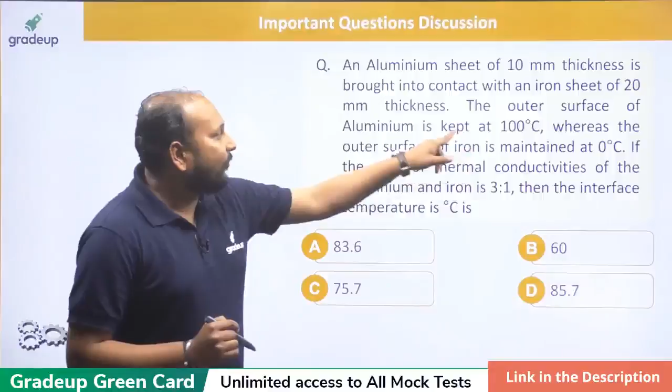The first question of the day: an aluminium sheet of 10 mm thickness is brought into contact with an iron sheet of 20 mm thickness. The outer surface of aluminium is kept at 100 degrees Celsius, whereas the outer surface of iron is maintained at 0 degrees Celsius. The ratio of thermal conductivity, K of aluminium to K of iron, is 3:1. You have to tell me what is the interface temperature. Quickly solve it.

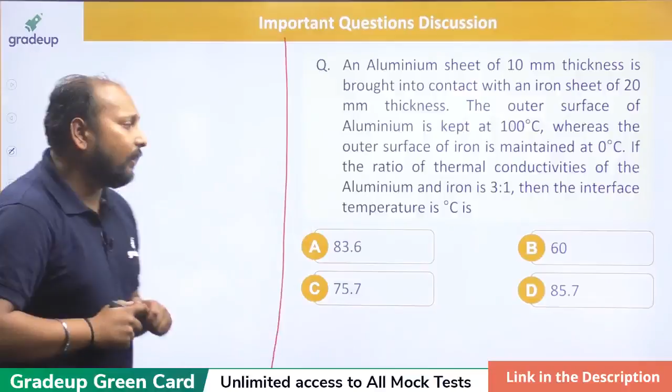So let us solve this question. Ajay Yadav, I got one answer from Ajay. Anyone else who has solved this problem? Rahul, Rashad, please quickly solve it. Very basic. Let me help you out.

It's basically we are having two different materials. One is aluminium and another is iron. Aluminium is kept at 100 degrees Celsius and iron is kept at 0 degrees Celsius. The thickness of aluminium is 10 mm, and the thickness of iron is 20 mm. You have to tell me what is the temperature at the interface T.

Very good evening, Akash. Yes, very good. I got one correct answer from Anil. Anil Akhil, your answer is correct. Ajay Jadhav, please check your answer. Pramod, yes, correct. Rashad KP, your answer is correct. Very good. Satyakant Mishra, very good. After long days, I am seeing Satyakant. Answer is correct.

So how to solve it? Very basic. It's in series, so same heat will be flowing. So directly you can apply Fourier's law of heat conduction. So it will be minus K of aluminium into cross section area into 100 minus T upon the thickness. Let us assume I'm taking in mm, so your calculation will be very easy. Is equal to, not minus, it will be plus, K of iron into cross section area into T minus 0 upon 20.

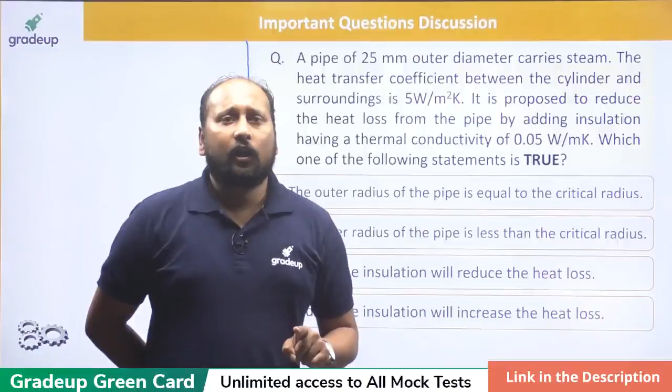What is the level of questions? It's basically at the level of SSC JE, 1 mark problems. You can practice previous year GATE 1 mark problems for VIZAG Steel. Because calculators are not allowed, you won't be getting very difficult problems, and time will be the main constraint, so you need to increase your speed.

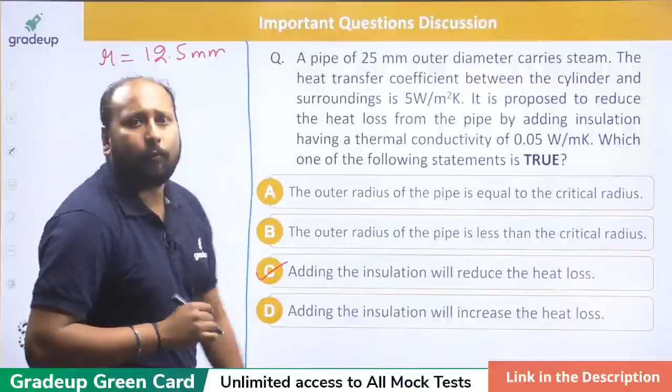Option C. Okay, very good. All of you are correct. Option C is the correct answer. Let us check. Your radius is coming out to be 12.5 mm. And RC, the critical radius of insulation, is K by H. Again, the same formula. K is 0.05 and H is 5. So it comes out to be 10 mm. Your RC comes out to be 10 mm.

Now, if RC is 10 mm, your radius is already 12.5 mm. That means on the graph, this is your RC, and you are lying in region number 2. Added insulation will decrease the heat transfer. So adding insulation will reduce the heat loss. Option C.

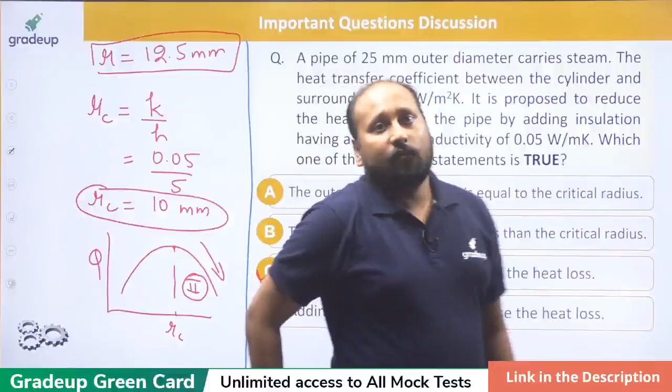Mohan Maya, yes, VIZAG Steel has postponed their paper. So yes, a similar pattern you can expect in SSC JE. So basically, you are preparing indirectly for SSC JE. Don't worry. Okay.

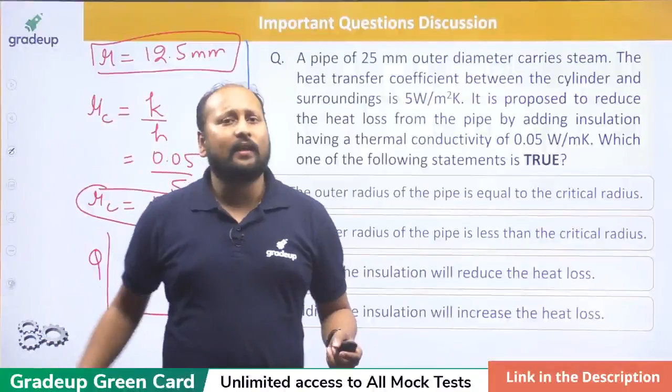Never ever. Whenever any exam is postponed or cancelled, don't worry, that preparation will be helpful for any other examination, and a series of examinations is coming in line, so don't worry, just be ready for any examination you are having. Let us go for the next question.

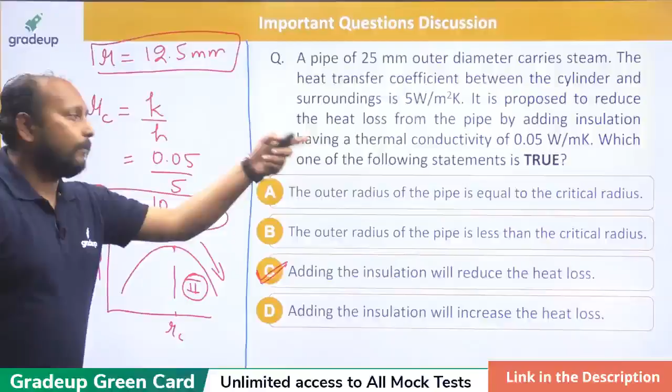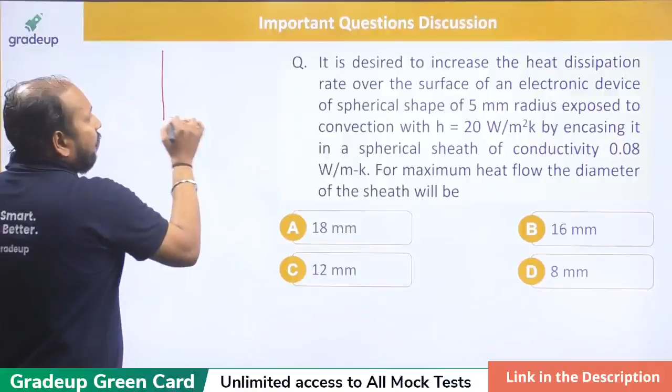It is desired to increase the heat dissipation rate over the surface of an electronic device of spherical shape. Please remember it's a spherical shape of 5 mm radius exposed to convection of 20 watt per meter square Kelvin, by encasing it in a spherical sheath of conductivity 0.08 watt per meter Kelvin. For the maximum heat flow, the diameter of the sheath should be? Quickly tell me. So basically they are asking when your maximum heat flow is occurring, this is your curve. It is occurring when your radius is equal to the critical radius of insulation.

Yes, quickly tell me. Now we are getting a mix of answers from Jagdish and Satyakant. Okay, Satish, fine. So I'm getting a mix of answers. Which answer is correct? Please tell me. Rashad is correct. Sharmila is also correct. Rahul Sharma is also correct. Very good. Rahul Sharma.

What is the formula for spherical? Please remember it's a spherical surface. So remember, whenever you are talking about critical radius of insulation for a spherical surface, the formula is RC is equal to 2 into K by H. Yes, exactly, Rashad, correct. 2K by H. Now, what is K? 0.08. H value is 20. So it comes out to be 8 mm. Your RC is 8 mm.

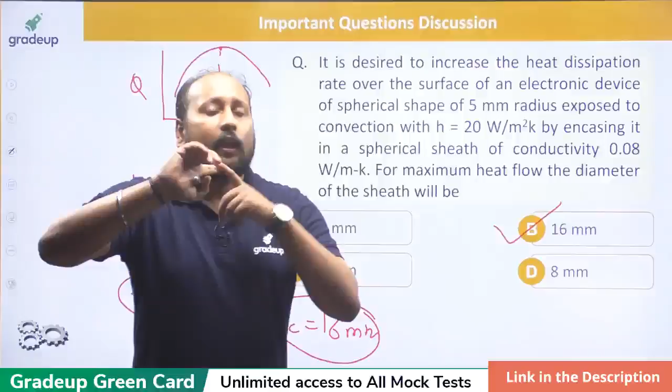In the question, are they asking radius or diameter? Please check the statement of the problem. They are asking the diameter. So those students who have responded option D are absolutely wrong. Then your DC is equal to 16 mm. So option B is the correct answer. I've seen some of the students have responded D. In a hurry, students do commit mistakes. They know the concept, but in a hurry, they mark the wrong option. So I deliberately took up this question. This is a very easy problem, but still students have marked option D.

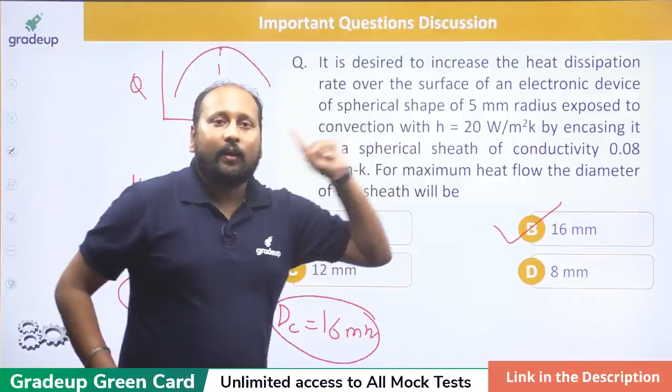Is that clear? So remember, always try to read the question once, and if you feel any parameter you need to write, just write it on the paper. If they're giving rough paper, just write it: diameter you need to calculate. Because in a hurry you might calculate radius, mark option D, and your answer is wrong. It's a very basic question.

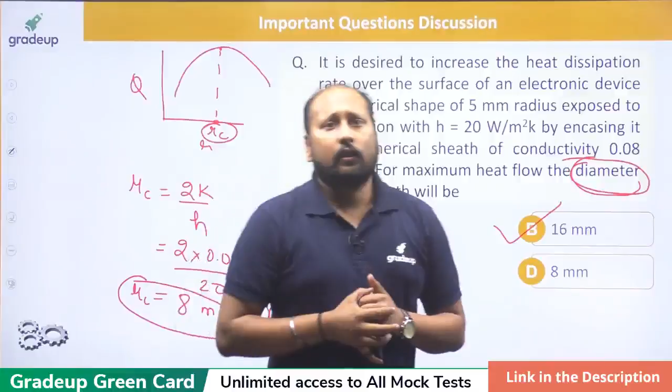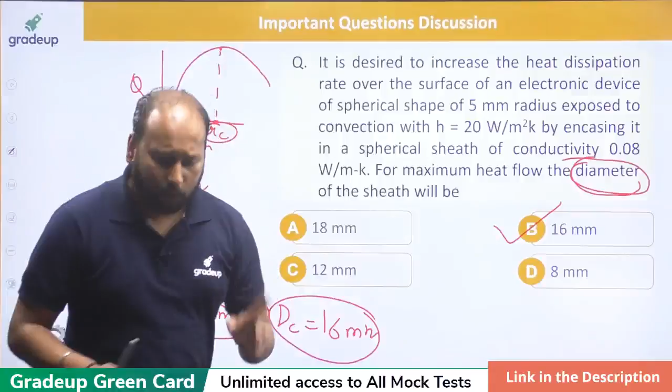Sir, will the BARC exam on Wednesday be postponed? No. BARC examination is still on its scheduled time only. No postponement of the BARC examination. Yes, VIZAG has postponed it. So don't worry about BARC. Let us go to the next problem.

Now, a spherical shaped orange, K is equal to 0.5 watt per meter degree Celsius, having 60 mm diameter, undergoes a ripening process and generates 8000 watt per meter cube of energy. If the external temperature of the orange is 20 degrees Celsius, determine the maximum temperature at the center of the orange. Now it's a question from the heat generation topic. Please apply your concept. There's a direct formula for calculation of the maximum temperature of the body. We have an orange whose surface temperature is 20 degrees Celsius. You need to calculate the maximum temperature of this body.

Q dot, your heat generation, is 8000 watt per meter cube. This is the internal heat generation. Next, let us convert this into radius. Radius is 30 mm. And the surface temperature TW is equal to 20 degrees Celsius. Now, what is the Tmax formula? I got one answer from Satyakant. Your answer is absolutely correct. Very good. Prahlad, yes, whenever you get a chance to attend sessions, definitely do attend them.

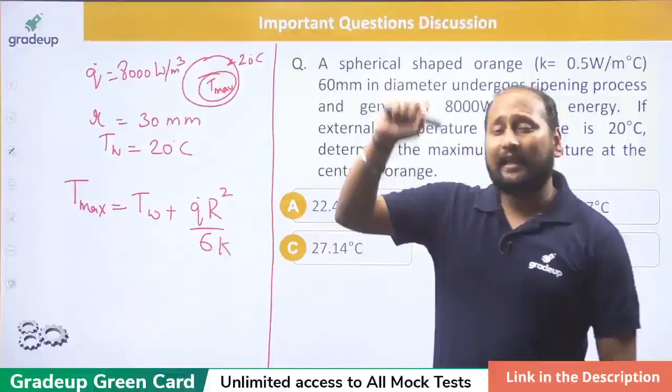So what's the formula? Direct formula: T maximum is equal to TW plus Q dot R square by 6K. Those who have studied the three-dimensional heat conduction equation in spherical coordinates with internal heat generation, remember, you have derived this expression. So they are asking this direct formula. T max: TW is 20 plus Q dot 8000 into radius 0.03 whole square upon 6 into K value 0.5. Try to solve it.

Yes, very good. Sadanand Mahato, correct. Avinash, Rakesh Mohanty, very good. Your option is correct. You will be getting approximately 22.4 degrees Celsius. So option A is the correct answer.

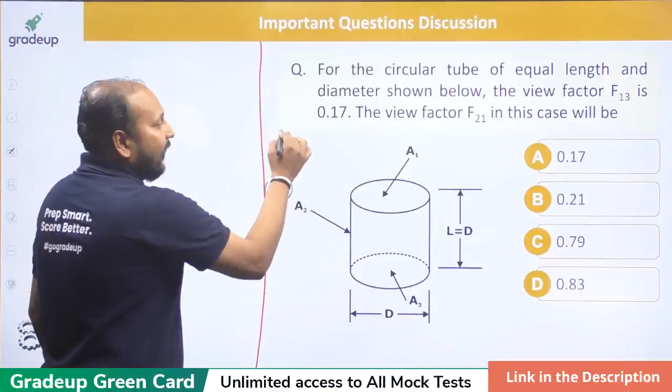Okay, so very good. So let us go to the next question. For a circular tube of equal length and diameter shown below, the view factor F13 is given as 0.17. F13 is equal to 0.17. It is given. Now this is the second type of problem which is definitely being asked in SSC JE and any PSUs, because it is very easy to solve. If you know the concept, you will definitely be able to solve this. Okay, just try to solve this problem.

F13 is given. They are basically asking what is the shape factor F21. This is surface 1. The surrounding circumferential surface is surface 2, and the bottom surface is surface 3. They are asking what is F21. How to solve it? You need to apply only two theorems, that is summation rule and second is reciprocity theorem. Just apply these two concepts, you will definitely be getting the answer.

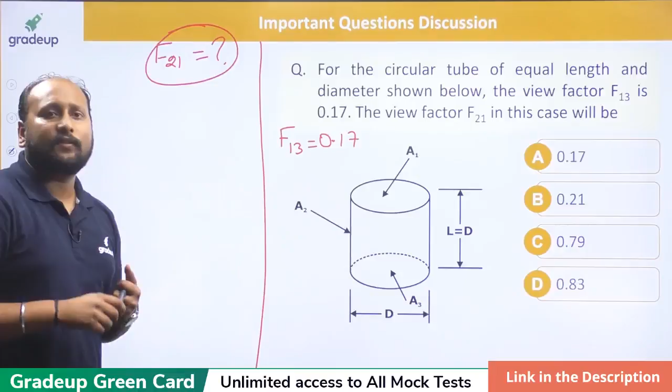So I got one answer from Nitish. Very good. Your answer is not correct, because I suppose you are calculating F12. Calculate F21.

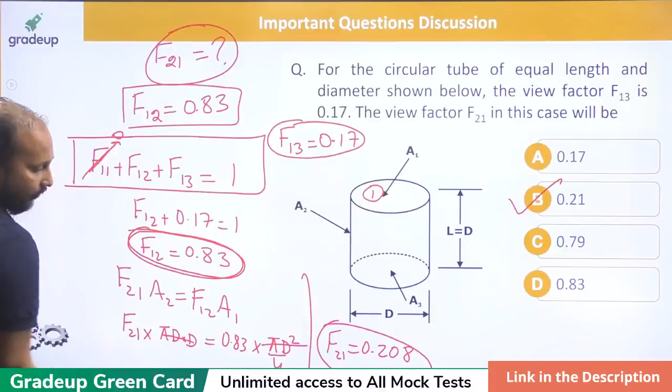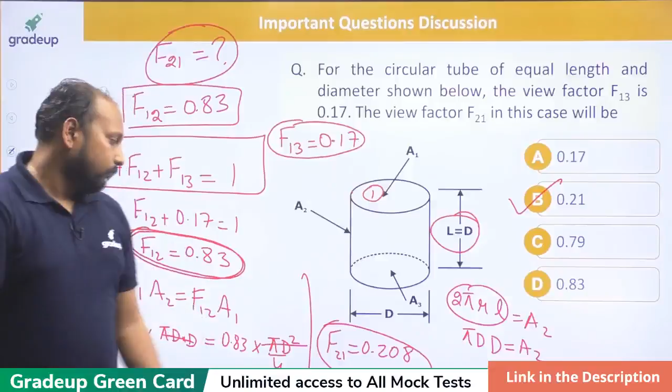So F21 into A2 is equal to F12 into A1. What is A2? A2 will be 2 pi R into L. This is the A2. Fine. In this case, what is radius? It is equal to capital D by 2, or you can directly write this as pi into capital D. What is L? L is equal to D. So pi D into D is equal to A2. A1 will be the area of this circle, which is pi by 4 D square. Clear? Just solve it. You will be getting the correct answer, 0.208.

Let us solve this problem. You need to apply Reynolds-Colburn analogy. Prandtl number is given. Prandtl number is equal to 0.064. Friction coefficient CFX is equal to 0.64. You need to calculate what is Stanton number.

Very good. I got one answer from Satyakant and he is absolutely correct. Anyone else? Option A, B, C or D? Yes, very good. Rahul is correct. Rahul Sharma, I got 2 answers. I need more answers from you guys. I'm giving you a hint.

You need to apply Reynolds-Colburn equation, which is Stanton number into Prandtl number power 2 by 3 is equal to CFX by 2. This is the formula. Now Stanton number you need to calculate. Prandtl number 0.064 power 2 by 3, and CFX is 0.64 by 2. What is 0.064 power 2 by 3? It is 0.4 whole square. So Stanton number into 0.4 whole square is equal to 0.64 by 2. Just calculate it. You will be getting Stanton number is equal to 2.

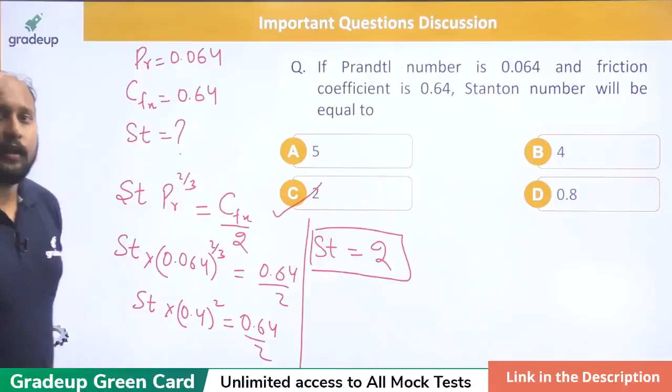Without calculus, option C. Option C, very good. Rashad, no, you will be getting option C as the correct answer. Option C. Clear? Option C, very good. Nitish, Jagdish, Gurana, Pralad, very good. Abhinandan, after a long time, Abhinandan. Option C, yes, very good, correct.

So let us move to the next problem. Now this question is from the heat exchanger. It seems to be a very lengthy problem, but when you read the statement, it's a one-liner problem. Just read the statement. A counterflow double pipe heat exchanger using superheated steam is used to heat water at a rate of 10,500 kg per hour. The steam enters the heat exchanger at, let me help you out with drawing the diagram.

Let me help you out with drawing the diagram. This is your hot fluid, this is your cold fluid. Your hot fluid is entering at 180 and leaving at 130. Your cold fluid is entering at 30 and leaving at 80. So this is your delta Ti, this is your delta To. Now what is delta Ti? Delta Ti is equal to 100, delta To is equal to 100. What is LMTD? Quickly tell me what is LMTD.

It is skin coefficient, coefficient of skin friction. Okay. Option C. Very good. Correct answer. Naveen, Ganesh, very good.

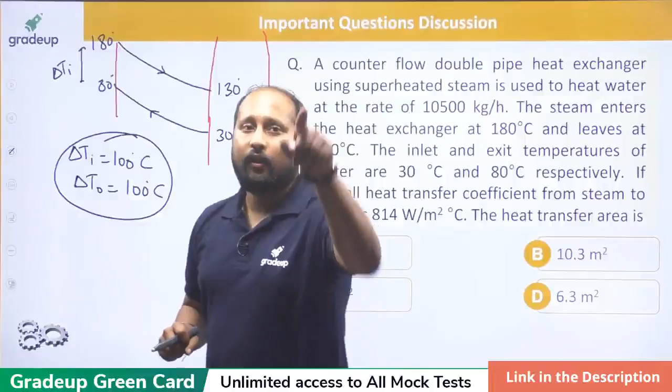Now, whenever you are having a condition such that your delta Ti and delta To are same, then what is LMTD? Very good, Nitish Kumar. In that case, your LMTD, which is denoted as delta Tm, will be exactly equal to any of the two temperatures, which is equal to 100 degrees Celsius. Exactly, very good. All of you are correct. Avinash, Rakesh, Satyakant, Ganesh, 100 degree.

Now, you can directly use the formula U A delta Tm is equal to m dot Cp delta T. They have given the mass flow rate of hot fluid, so you'll be using the hot fluid, and please convert this into SI units. So this is 10500 divided by 3600 mass flow rate into Cp of water, 4187, into temperature difference, 180 minus 130, so it will be 50.

You need to calculate area. U value is already given, it is 814. So you'll be getting A approximately equal to 7.5. Option C, you'll be getting option C as the correct answer, 7.5 meter square. Exactly. So whenever in counterflow these two temperature differences are the same, you can directly say LMTD is equal to any of the temperature differences. Is that clear? So option C, 7.5 meter square is the correct answer.

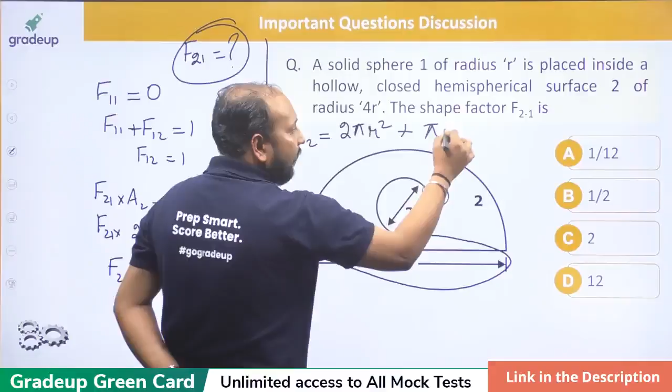Now there is one thing: this is your 2 pi r square, plus you need to take this area also. This is your pi r square, which is 4r whole square. You need to take that also. If you take this, this will be the total area. So let us change the value of A2. It will be F21 into 2 pi 4r whole square plus pi 4r whole square. Now it's correct. So F21 will be 1 by 12.

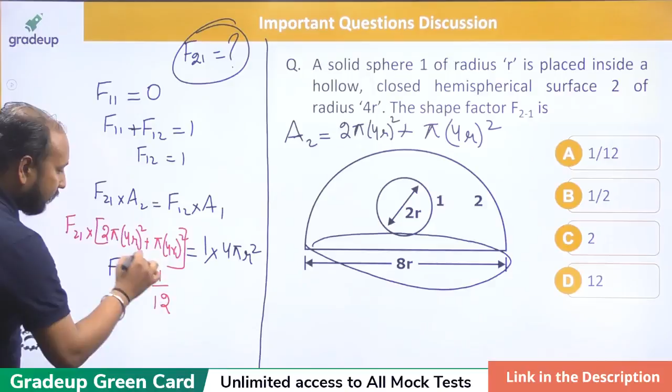Just take the common term of 4 pi r square, that will be cancelling out. Just take this 4, you'll be getting 1 by 12. Exactly. Very good, Rahul. And please check, Dikshant, you'll be getting option A, 1 by 12. 1 by 12 is the correct answer.

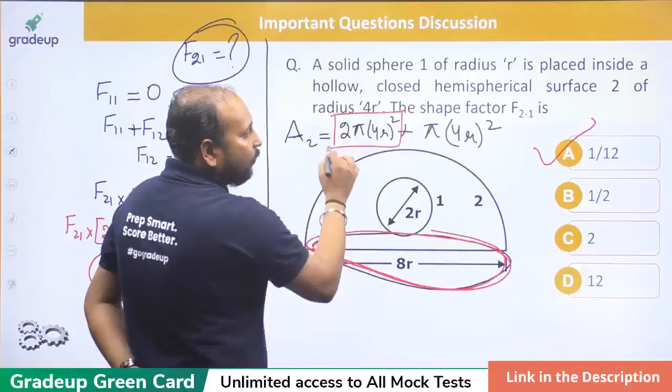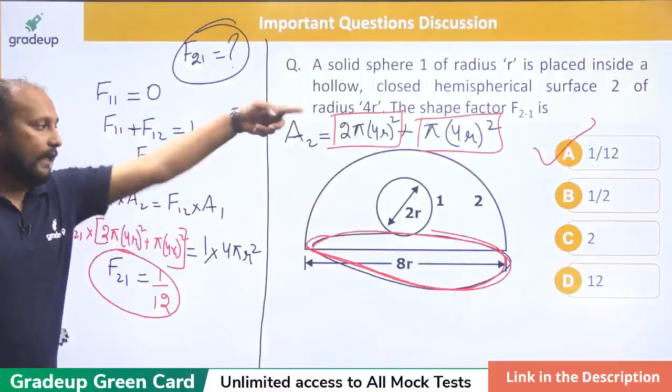You need to take the complete area, because you cannot neglect this area also. So what is this area? This is 2 pi r square, which is your 4r, plus pi r square, which is pi 4r whole square. Thank you, Prahlad. So 1 by 12 is the correct answer, option A. I suppose now you have understood how to solve the problem coming from shape factor. Let us move to the next problem.

Now this problem is from your convection topic. Yes, you need to take the total area, because some of the students in a hurry are not taking the base circle, which is also one of the surfaces of that hemisphere.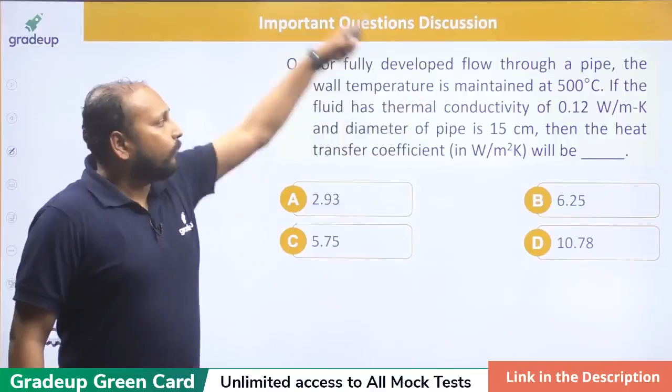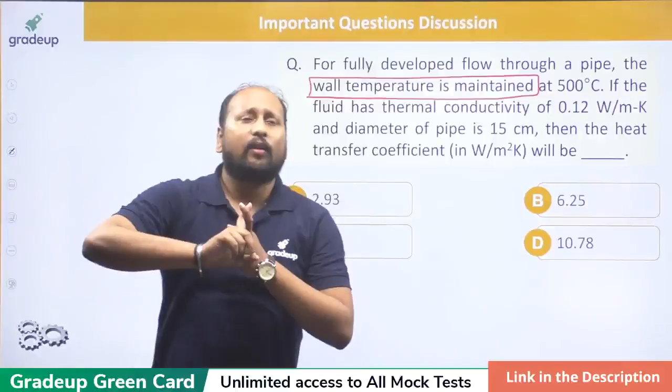Now talk about this. There is a flow through pipe going on. The wall temperature is maintained. What is the meaning of this term? Always remember, whenever we are talking about flow through pipe in laminar flow, there are two approaches: one is constant heat flux and second is constant wall temperature. So this is the case of constant wall temperature.

So what is the Nusselt number for constant wall temperature? Always remember, it is directly equal to 3.66. So h into D by k is 3.66. You need to calculate the value of h: 3.66 into k, which is 0.12, divided by diameter. The diameter of the pipe is 15 centimeter, that is 0.15. So tell me the approximate value.

Yes, exactly. If this had been constant heat flux, the Nusselt number would have been 4.36, so you can expect another question like this. This is a constant wall temperature case, so the Nusselt number is 3.66, and h will be approximately 2.9. So option A.

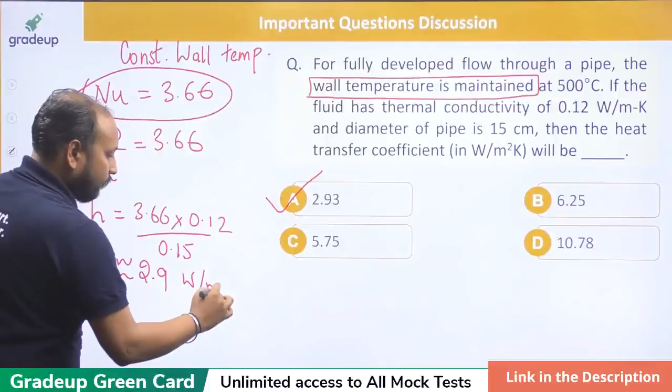Option A. Okay. Yes, very good. How to get a maximum in exam, solving more problems or understand problems? How to get maximum in exam? Look, if you are talking about SSC JE or any PSU exam, you need to increase your speed, because the question difficulty is not that much high. You need to increase your speed, then only you will be able to crack it.

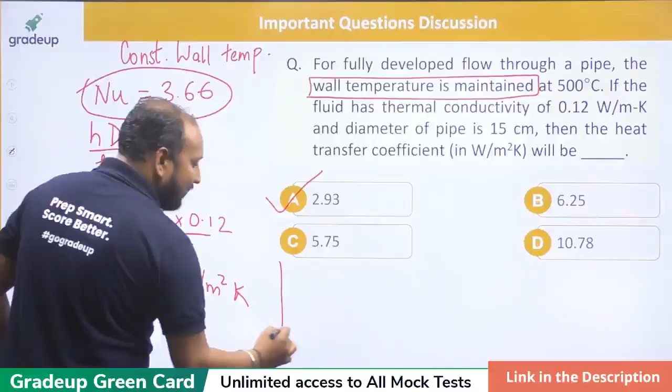Effect of variation of K with temperature distribution. I have discussed this. There are three curves. Those who remember, there are basically three curves like this. Fine. Your temperature with distance x or delta. So there are three curves. One is beta greater than 0, beta less than 0.

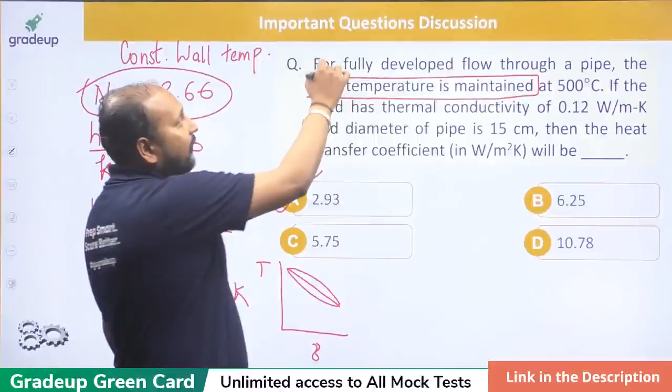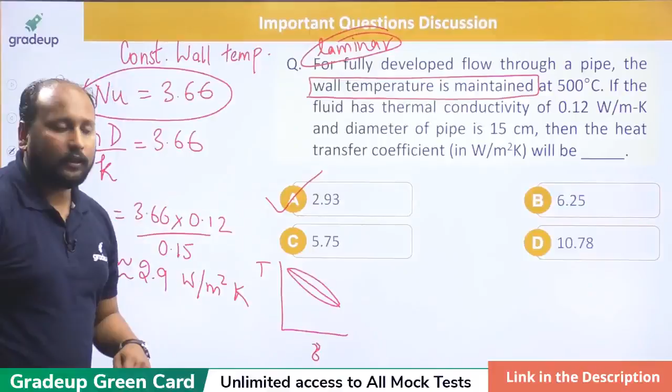Yes, you need to assume it to be a laminar flow. Why laminar flow? If this would have been a turbulent flow, they need to give the expression also. They need to give the empirical formulas also. Then only you will be solving the question from the turbulent flow. Now in this case, no velocity is given, and also they are stating it as fully developed flow. Wall temperature is maintained. So by default, they are talking about a laminar flow, that is constant heat flux condition or constant wall temperature condition. Clear? Next question.

Yes, again a very basic question from your

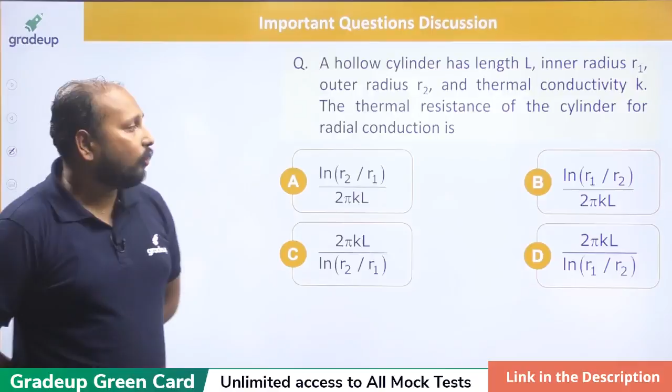Yes, very good all of you. Mahato, Rashad, Sadanand, Rahul Sharma, very good. Lucky, option A is correct, because what is the formula for a cylinder? For a cylinder, your thermal resistance RTH is equal to ln R2 by R1 upon 2 pi KL. This is a pipe having a length L. It is a hollow pipe having radius R1 and R2.

We take a bigger circle. So this is R1, this is R2. So ln R2 by R1 upon 2 pi KL. Option A is the correct answer. Very good. Let us move to the next question, because I don't suppose any explanation is required. It's a direct formula base.

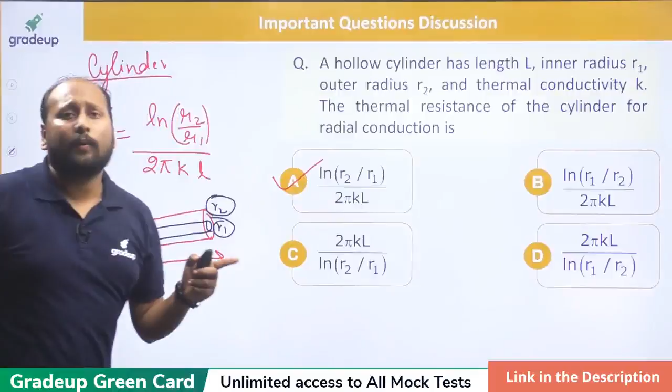Chiranjit Karmakar, no, option B. How can it be option B? This will be negative, because R1 is the internal radius and R2 is the external radius. If this were negative, then the thermal resistance would be negative, which is not justified. It should be a positive value. So it is ln R2 by R1. Option A. Next question.

A solid cylinder is located at the center of a hollow sphere. So we have a hollow sphere, and at the center of the hollow sphere we have a cylinder. The cylinder is surface 2 and the hollow sphere is surface 1. The diameter of the sphere, D1, is 1 meter, and the cylinder diameter and length are both 0.5 meter, that is D2 = L = 0.5 meter. You have to tell me what is F11. You need to calculate F11.

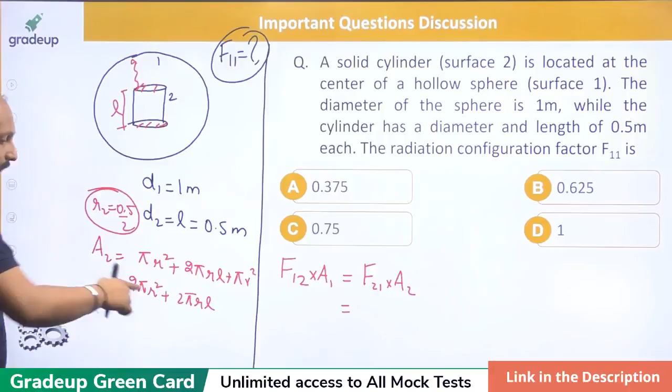Now what is the radius? R2 is equal to 0.5 by 2. Instead of radius, you can express it in terms of diameter. So this will be pi d square by 4, the 2 will be cancelled, plus pi d L. Why am I writing in terms of d and L? Because the diameter and length of the cylinder are the same. So this is pi d square by 2, plus, instead of L I can write d, pi d square, because d2 is equal to L.

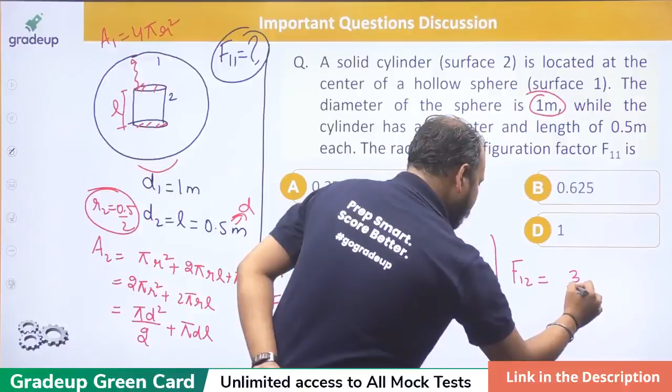Now what is A1? This is a sphere, so A1 is equal to 4 pi r square, which is pi D square, capital D, the diameter of the sphere, which is 1 meter. So I can write pi into 1 square into F12. From this you can get the value of F12. So F12 is equal to 3 by 2 d2 square.

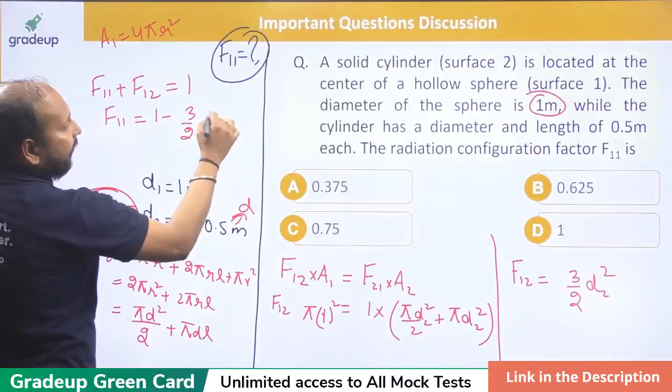Now you need to calculate F11. F11 plus F12 is equal to 1. So F11 is equal to 1 minus 3 by 2 into 0.5 whole square. So we'll be getting 0.625. So option B. Yes, very good. Option B is the correct answer. You'll be getting 0.625.

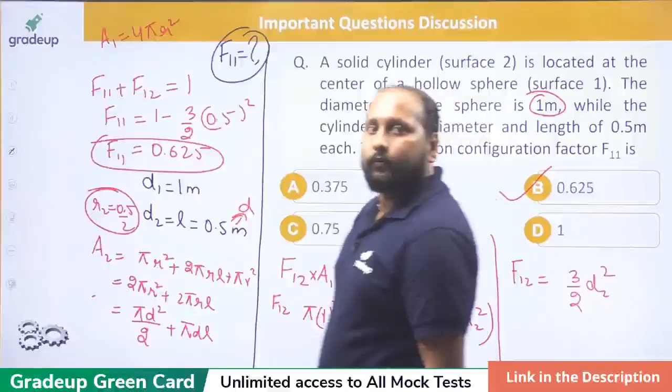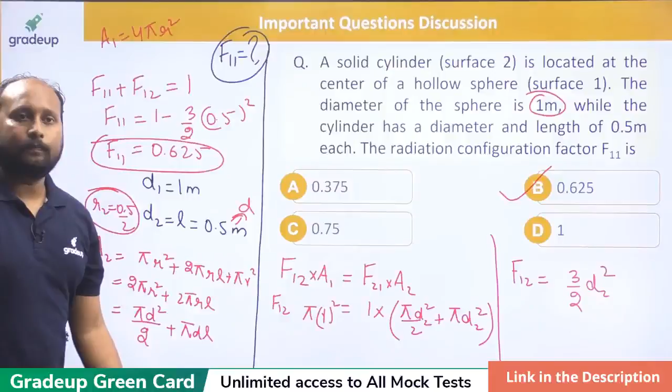You'll be getting 0.625. Option B is the correct answer. Very good, 5 by 8. It is approximately equal to 5 by 8. So Rashad, Sadanand, Satyakant Mishra, all of you are correct. So we'll be getting F11 as 0.625. Let us move to the next question quickly.

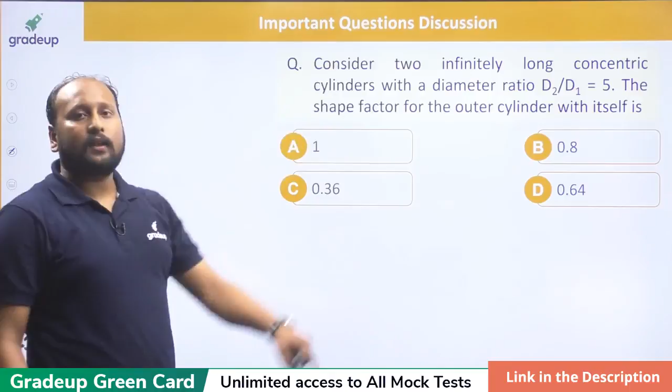There are infinitely long cylinders having diameter ratio d2 by d1. What is the shape factor of the outer cylinder with itself? That means, let us suppose I am taking the side view. Take this as d1. Fine. So this is surface 1, this is surface 2. So they will be asking what is the value of F22. Quickly solve this problem. What is the value of F22? So very basic.

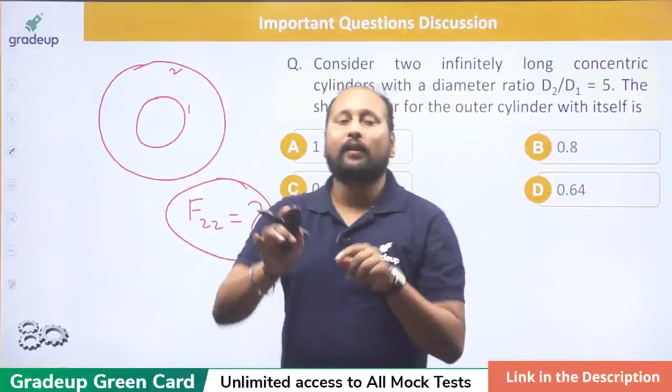That is why I am saying in every session, always try to gain the knowledge and try to apply that concept in the questions. Then only you will be able to crack any examination. Okay. Now I've got one answer. Nitish, your answer is absolutely correct. Lucky, please check your answer, whether it is equal to 1 or it is 0.8.

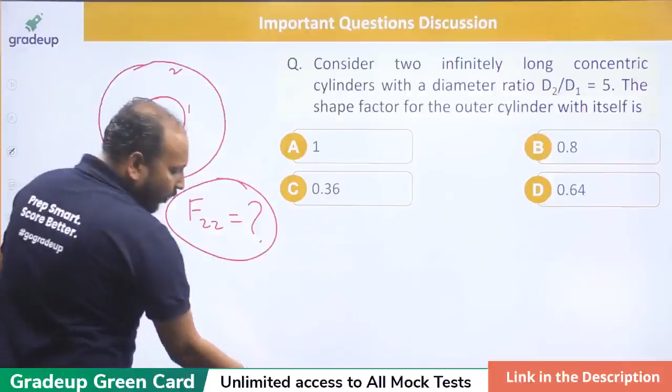Please check it. Definitely it won't be equal to 1, because if I talk about F22, some of the radiation which is leaving surface 2 will be hitting surface 1. So it should be less than 1. Very basic thing. F12 is equal to 1. The radiation which is leaving surface 1 will definitely all be reaching surface 2. So F12 equals 1. So you can directly write F21 is equal to F12 into A1 by A2.

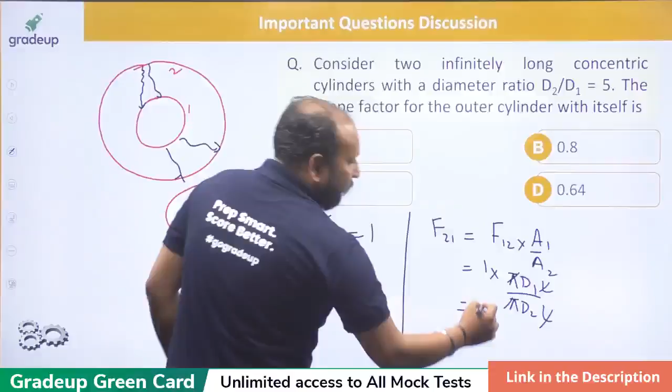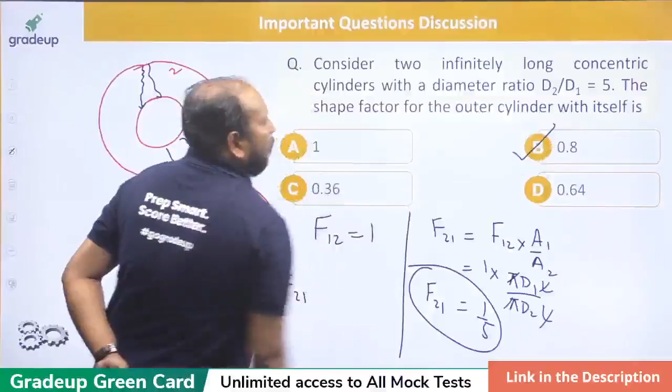This is 1. This is a cylinder, so this will be pi d1 into L upon pi d2 into L. This will be cancelled. So this is d1 by d2, which is 1 by 5. So F21 is 1 by 5, and you need to calculate F22. So F22 is equal to 1 minus F21, which is 4 by 5, 0.8. Option B. Yes, very good. 0.8 is the correct answer.

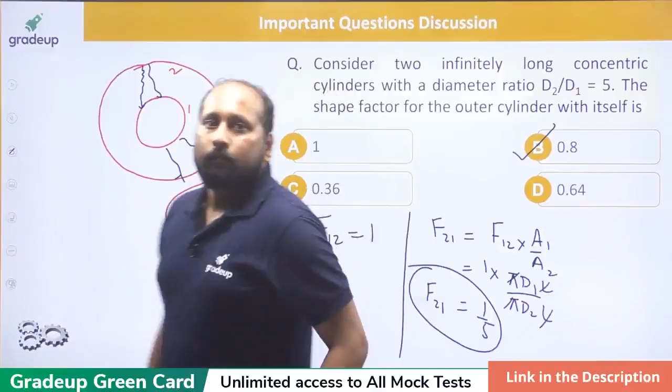Jitu, correct. Rashad, Satyakant, Avinash, very good. All of you are correct. Shemu, Pralad, please check your answer. Devjyoti Roy, very good. Option B is the correct answer, 0.8. I want everyone to please solve it quickly so that we can solve more problems. Next question, again from the convection topic.

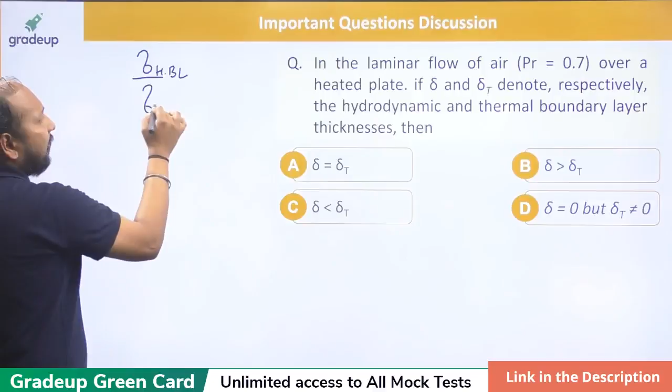Now basically they are asking, what is the relation between the thermal boundary layer and the hydrodynamic boundary layer? Prandtl number is given as 0.7. So you have to tell me which boundary layer has higher thickness or whether they are equal. I'm getting one answer from Dikshant. Very good. Pralad, your answer is correct. What's the formula? The hydrodynamic boundary layer thickness, delta HBL, to the thermal boundary layer thickness is equal to Prandtl to the power 1 by 3.

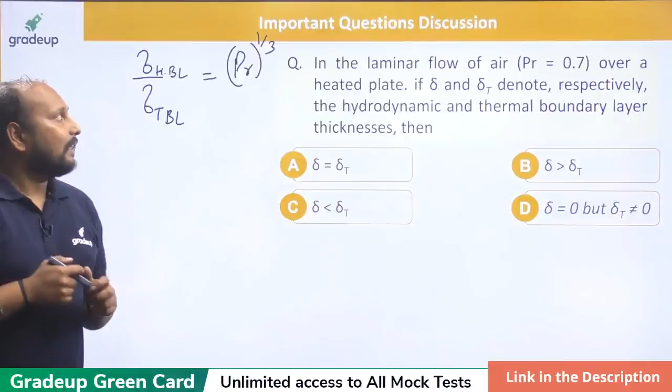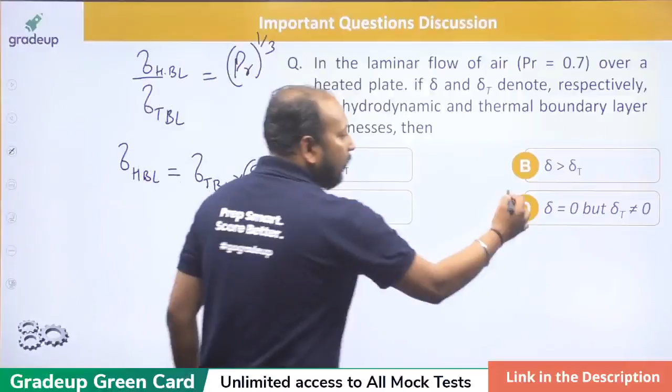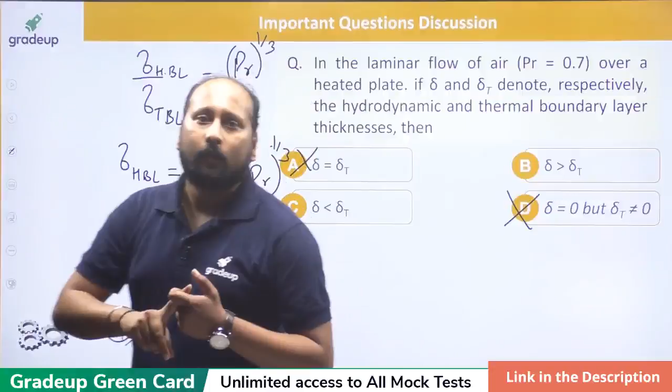Now, if Prandtl is less than 1, what should be the case? That means delta HBL is equal to delta TBL into Prandtl number, which is less than 1. So which thickness will be higher? Option B or C? Definitely it won't be A, it won't be D. Yes, Kalyani, no, it won't be A. Only when Prandtl number equals 1 are both boundary layer thicknesses the same. Option C, very good. Exactly, option C, because this is less than 1.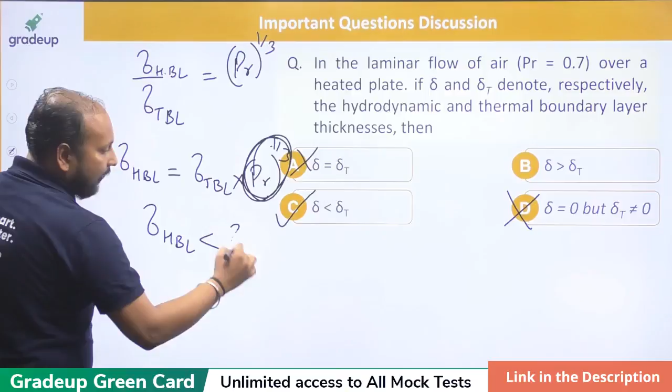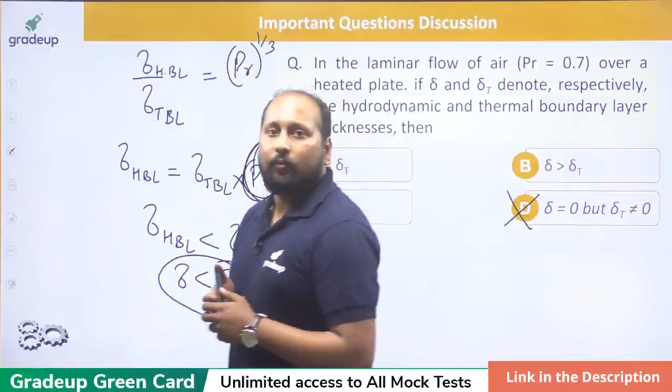If this is less than 1, definitely your delta HBL will be less than delta TBL. Or we can say delta is less than delta T, since we also denote the TBL as delta T. So option C is the correct answer. Very good. Johnson, Satyakant, Shemu, Lucky, correct. Very good, all of you. Okay, let us move to the last problem of the day.

Again, your Reynolds-Colburn analogy. So it will be CFX by 2 is equal to Stanton number into Prandtl number power 2 by 3. Prandtl number equal to 1. You need to calculate CFX by 2. What is Stanton number? What is the formula of Stanton number? It is the ratio of Nusselt number by Peclet number. What is Peclet number? It's a product of Reynolds number and your Prandtl number.